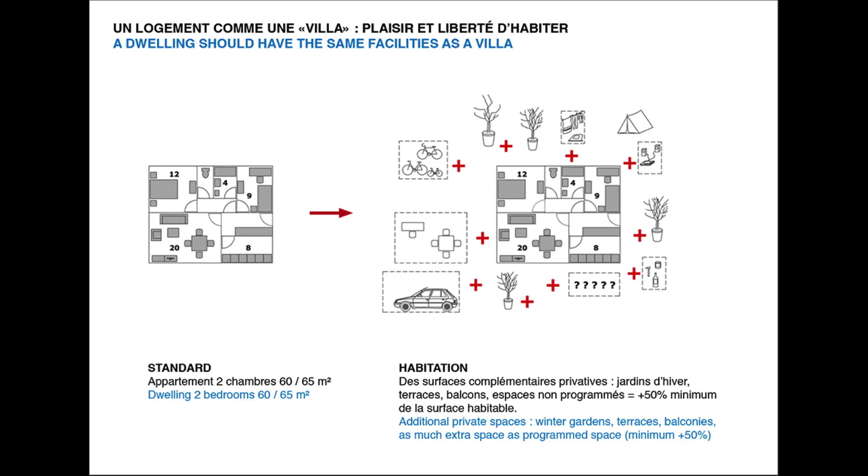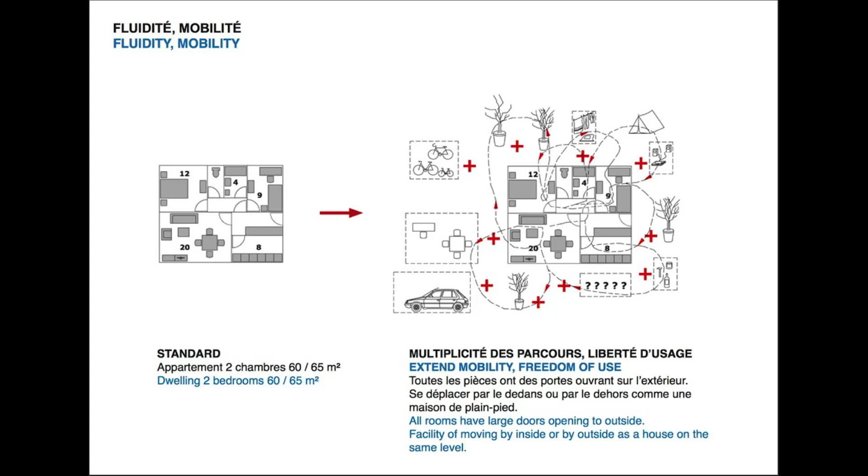Dwelling as a villa is also about fluidity and mobility. In a standard house, there is always one way to go from one room to another. The extra space allows to extend mobility and freedom of use. All the rooms should have large doors opening to the outside to give the facility to move not only from the interior but also from the exterior space, from one room to another.

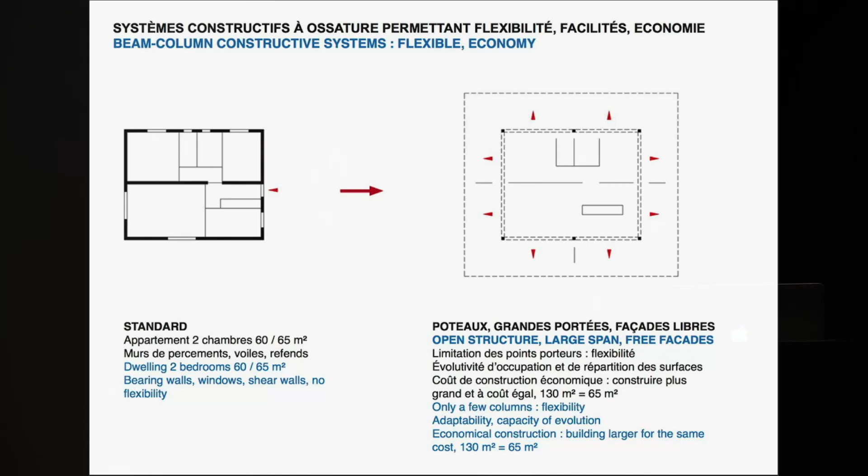It's what makes for us the quality of living in a villa. Then the use of open structure instead of building with very rigid bearing walls. We like to use the principle of open structure built with floors, large span, that allow us to free the facades, with only a few columns which allow the flexibility and the adaptability. It's also a very economical construction because we can use standard prefabricated structure. This allows most of the time to build housing at the same cost, but twice as large, with such structures.

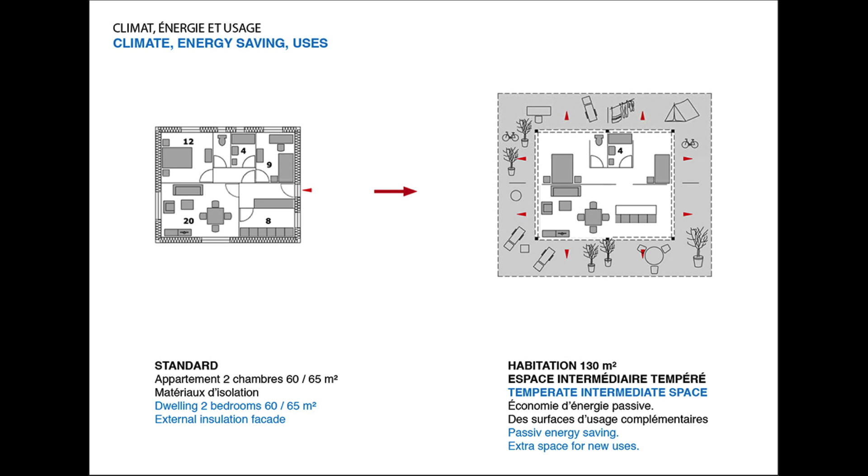Then the climate and energy saving. Instead of using the principle of insulation, we prefer to create this insulation through an intermediate space, a temperate intermediate space that is created by the principle of winter gardens. That summarizes all this idea of fluidity, mobility, openness, facility of movement, which for us characterizes a villa. There's also interesting efficiency in terms of passive energy systems, and at the same time it creates this extra space for use.

So building like a villa, dwelling like a villa, was our intention when we designed, a long time ago, our first house. We built it around 1992. Our aim for this family was to break the standard and to provide them with a generous and pleasant space to live in, despite the small budget. For the same budget, they could expect a small house of 60 to 70 square meters. Our goal was to double this surface for living compared to the standard, and to create an extra space as big as a traditional space.

So we were also involved in designing a bioclimatic house, which would take maximum benefit of the natural elements, especially the sun and natural ventilation. We used a very simple system of construction, and we were inspired by the technology of agricultural greenhouses to create such a space, oriented on the east, that is very efficient to create a good climate compared to the outside, but also a very interesting volume connected to the house to extend the living room.

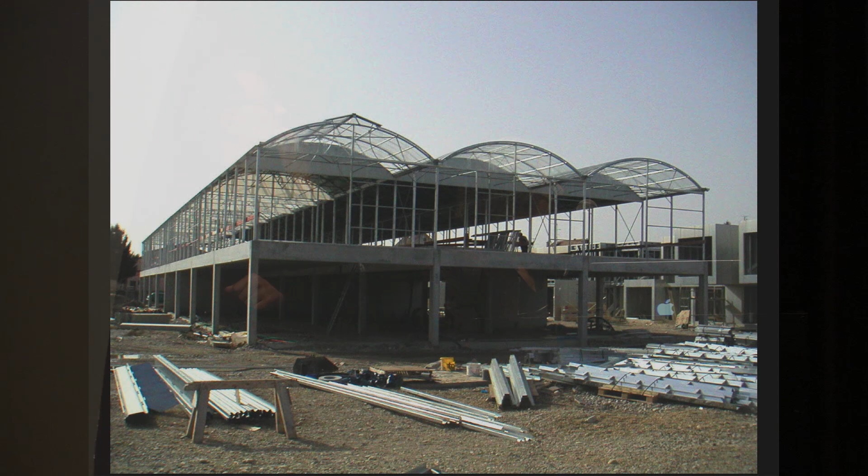So here again, we tried to see how it was possible to build larger without expanding the budget. We used especially the technology of greenhouses, a space we had studied carefully, and we observed that it was not only a very nice space but very clever and intelligent in the way it manages the natural climate with great precision, because growing flowers or vegetables for the market has high importance and high value for farmers, so they must be able to control the climate inside with great exactitude.

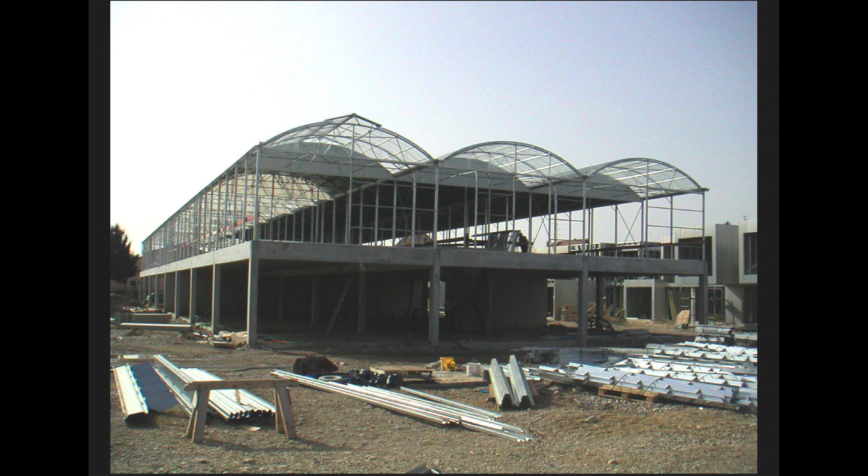So we proposed to use this technology in addition to a concrete open structure, and to build two levels: the ground floor, covered by a big concrete platform with only a few columns to support it, a prefabricated structure, and on top, 3 rows of greenhouses, exactly like we can find in the countryside. That construction system provided the biggest volume we could achieve on the site, at the maximum limit of construction and allowed height.

And then inside, we built with this structure like a very big loft. Afterward, the work was to divide it into 14 houses. And this is the final result, with these two different levels, the ground floor and the first floor.

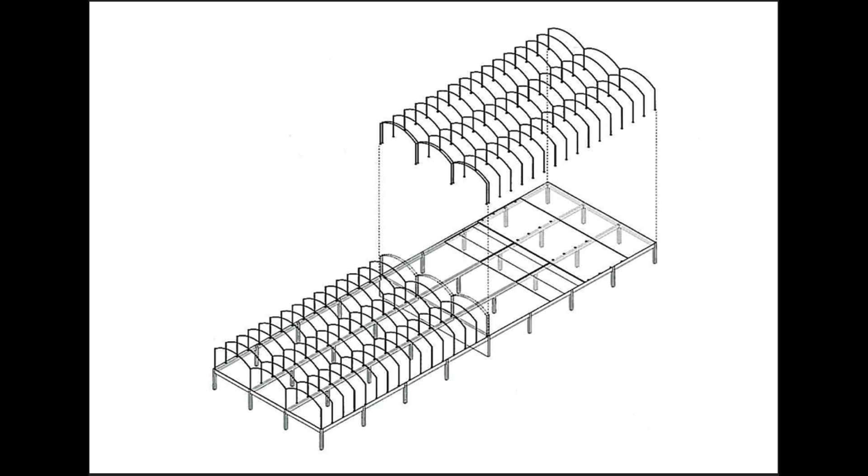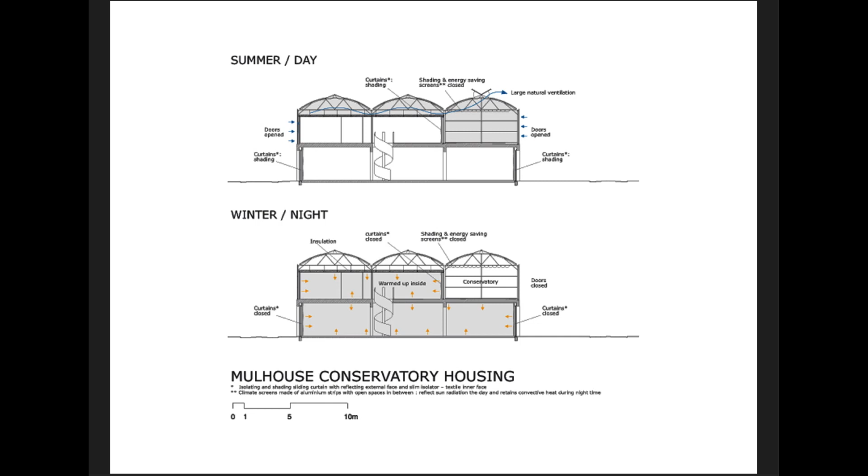So the constructing system, which is simple, efficient, and very economical, but also provides interesting space, because the efficiency must be given to the service of a nice living space. That allowed us to create two different atmospheres and conditions of space, the ground floor and the first floor under the greenhouses.

That was occupied by some wooden insulated boxes to extend the living space. We decided that every dwelling should have both conditions of space, ground floor and first floor, which gave this division of the plan, of the big volume we created, with every dwelling having 2 levels. Sometimes it's big on the ground floor and small on the first floor, and the neighbor is the opposite.

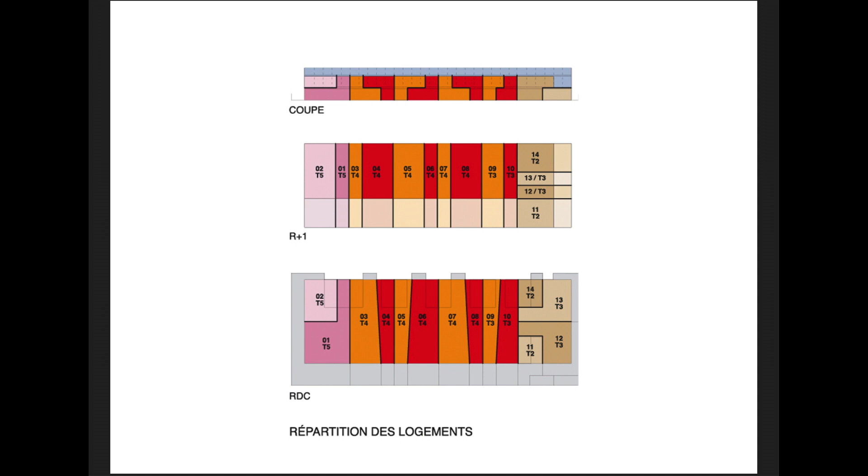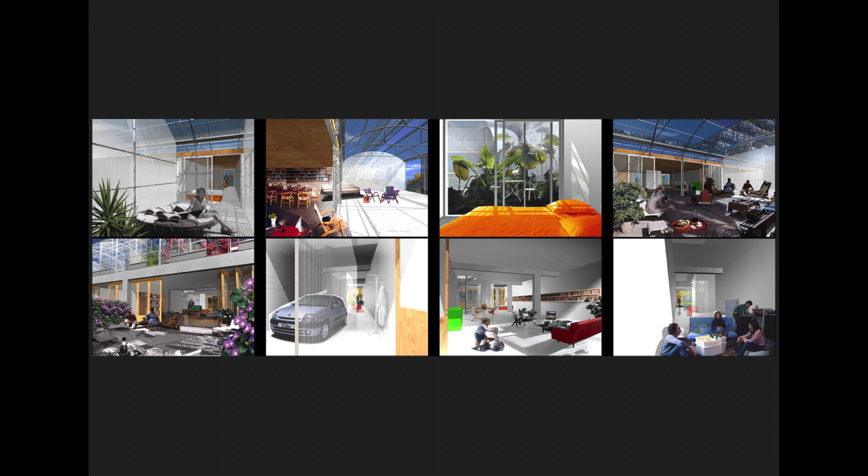We determined a dimension for the facade of the living room, which should be around 6 meters wide and 3 meters for the bedrooms. So in terms of representation, that was the representation of what could be one dwelling with a ground floor area and the first floor space under the greenhouses.

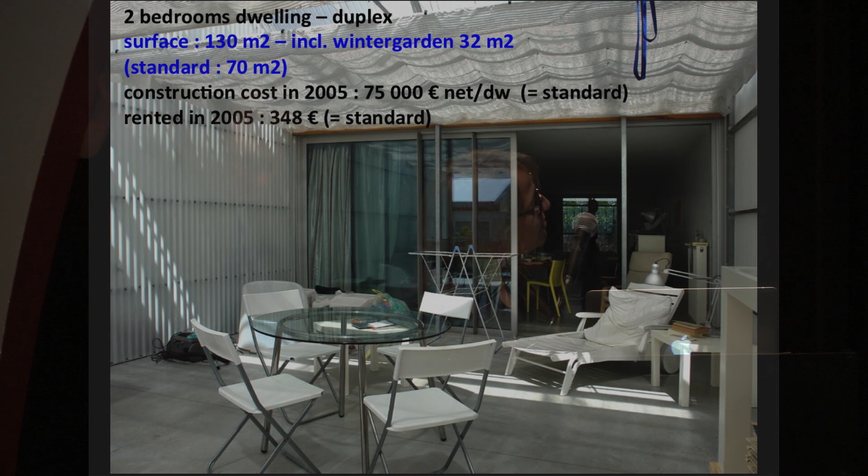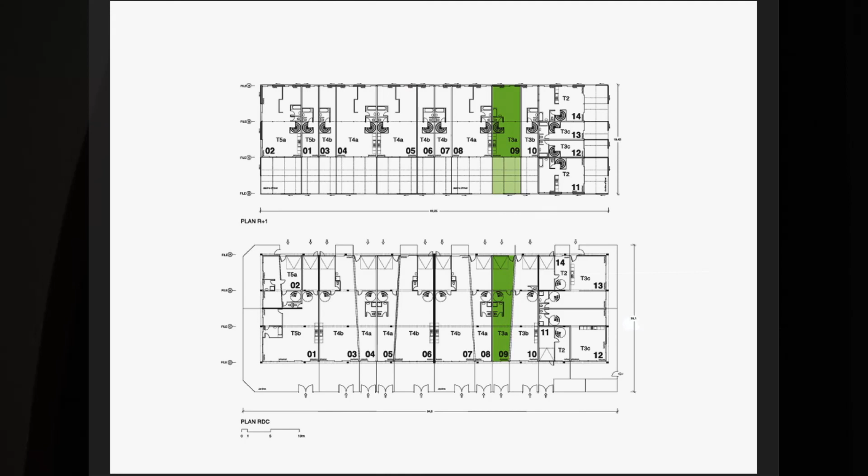Then we discussed with the owner. It was a very important discussion about the relationship between the rent and the surface of the dwelling, because normally the rent is determined in function of the surface. At the moment, we were providing in the same budget twice more square meters. It was important that the rent should not be increased twice as much, because otherwise it could not be social housing anymore. That was an interesting discussion, but the owner agreed very fast that if we built the project for the same cost, he would not change the rent, and he would rent the 130 square meters at the same cost, the same rent, as the 70 square meters.

So that's one of the dwellings, with the garage, which is also like a room that could be transformed very fast. And the first floor, which is a large living room connected with no partitions, the partitions have been made by the inhabitants themselves, and this large winter garden, which is connected to the living room.

And the dwelling, also a 4 bedroom dwelling, with 187 square meters instead of 100 square meters of the standard, and again the same cost of construction and the same rent. So this is this dwelling: the ground floor with 2 bedrooms, and the first floor with a large living room of 60 square meters, which has an extra space of another 60 square meters with this winter garden.

So just a few pictures for that. The owner was very happy with the result, as well as the inhabitants. Then we did a second project with the same owner, which is a public social housing company, but in this case it was a more dense condition with 5 levels. It was interesting to see how we could develop this idea of extending the space, making dwellings like a villa in a more dense situation.

So for that, the space has to be extended—not only the program, but also what can be considered around: space for invitation, collaboration, exhibitions, events, music, workshops, etc. So a platform of discussion.

We were thinking that in this old place where the harbor was, the first project could have been a sort of industrial building, something that could have been done perhaps 50 years before. So we tried to imagine this building could have been there before, and this is the idea to extend the space.

The budget for the School of Architecture for a program of 10,000 square meters was about 16 million euros. So the question for us was not only to make 10,000 square meters, but to provide 20,000 square meters for the school, and including the outside space, 30,000 square meters of floor to create this capacity as a platform. So the building is extremely efficient and economic in order to create this dimension within the same budget.

So for that, we created a sort of first building, an industrial building with three different levels: the first one 9 meters high from the ground floor, the second one 7 meters higher, and the third, which is also the roof, 7 meters higher again. Each of these floors has a capacity of 1 ton per square meter, much higher than normally demanded for the program.

And here it is the natural ground of the city, which is highly compacted in order to have a different nature than the artificial floors above.

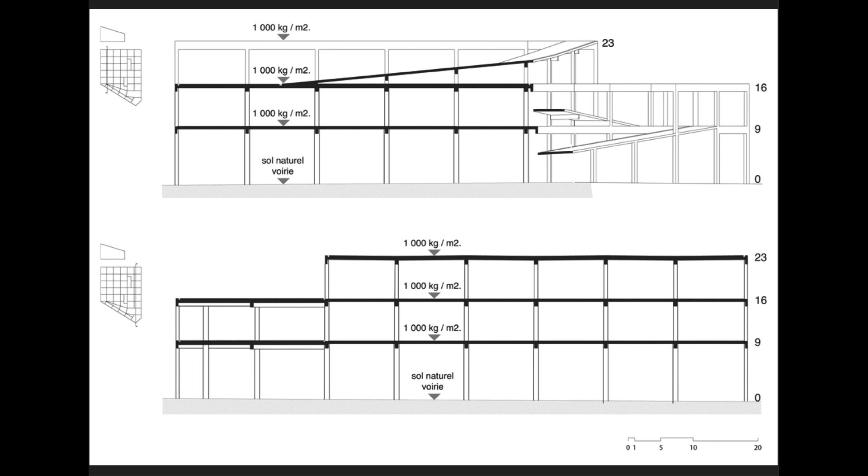A ramp, a sort of street, sometimes between 8 meters to 5 meters wide, gives the possibility for pedestrians, bikes, and also cars to go from the ground floor to the first level, to the second level, and then to the roof, considered as a sort of large agora.

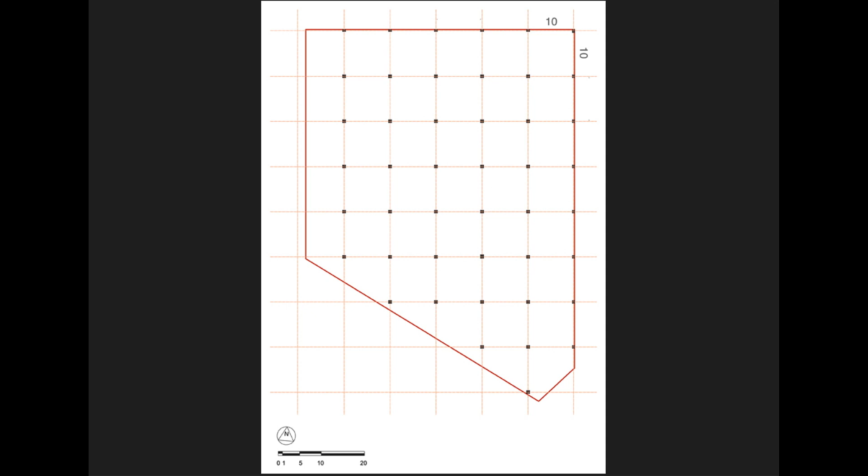So a very high, robust system with a grid of 10 meters by 10 meters, using only standardized component systems—columns, beams, and floors—with an extremely fast construction system, nearly 300 square meters a day, which makes this construction extremely efficient, extremely robust, but also very economic.

All the space of the parcel is taken—there are no places left. So we take the maximum dimension of the parcel and the maximum height permitted by the regulation, offering the maximum capacity.

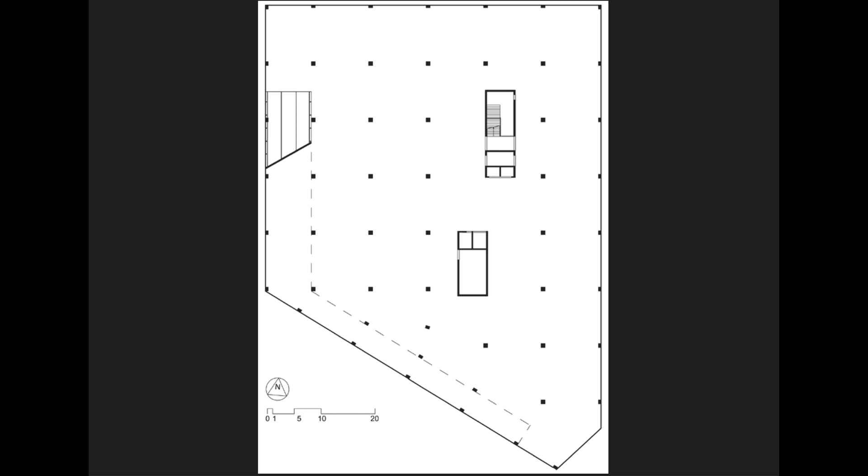So we see here the first level with the start of the ramp and the 2 cores for vertical distribution. This was the building offering capacity before the occupation by the School of Architecture.

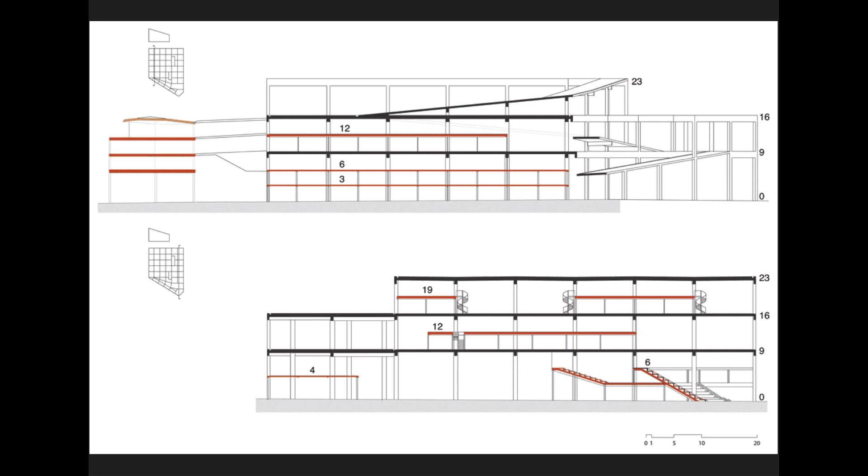Because the School of Architecture, coming inside this building, was able to establish new platforms, very light construction in steel and wood, that could take the capacity of the height and the resistance of each floor, creating a sort of mezzanine system to offer the possibility for the school's program and functions. And the auditorium is in this part here.

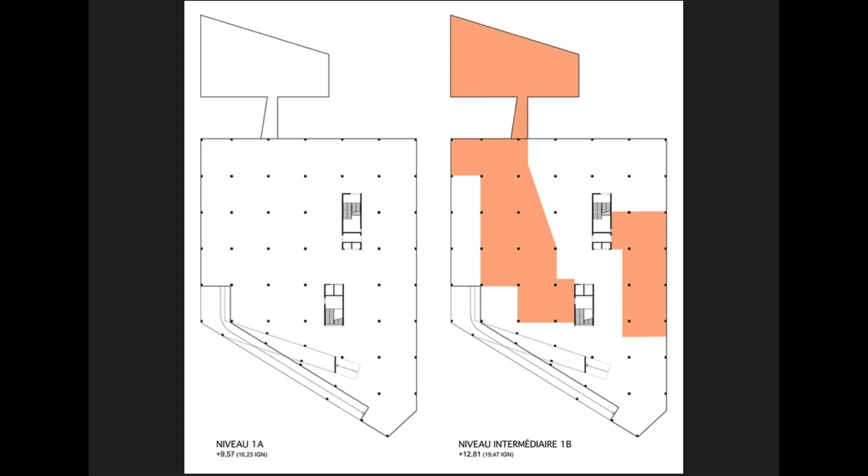These platforms take this dimension and occupation on each of the main levels. For example, here the level 1 is occupied by this mezzanine, 3 meters higher than this. Or the level 2, occupied by this mezzanine.

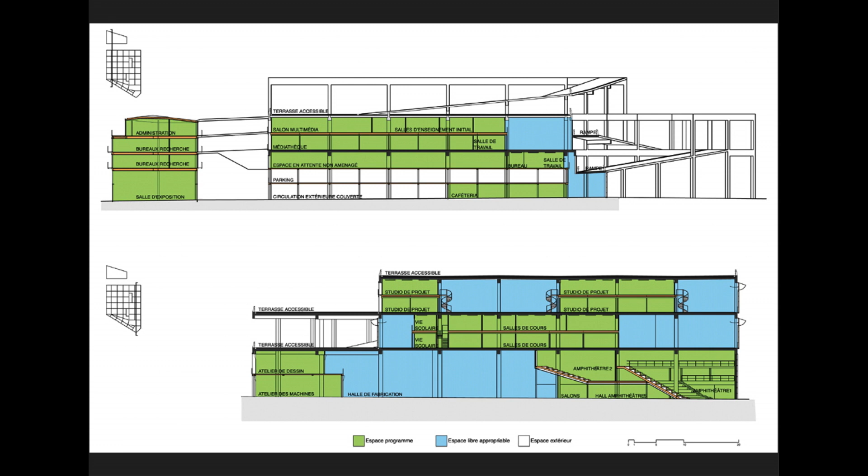By this definition of spaces, we create also inside the system 2 different climates. One, in green, is the standard climate, normally defined by the program—20 degrees in winter and a good temperature in summer. But also this one, the blue one, is a sort of intermediate climate, just slightly heated in order to never go under 10 degrees, but most of the time taking the radiation of the sun for a bioclimatic situation and solar energy.

And then the project was done with these elements and with this situation, also leading to this economy of project.

So every time it was possible to create relations with the city, to open the situation, we tried to make it. For example, here for the auditorium, there's a large door opening in order to create a relation between the audience, the stairs, and the outside, and the river, which is close to the school.

The space where we can build a lot of models is 1,000 square meters large and 10 meters high, which offers a lot of possibilities—possibilities of storage, to bring containers inside the school from the street.

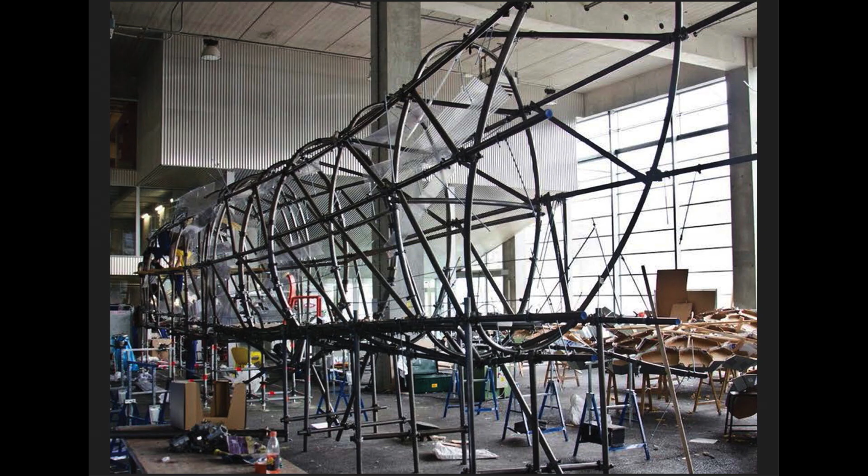You see here the existing ground of the city, which is very compacted, offering this connection with the street, and the possibility for students and professors to imagine different kinds of projects inside without any constraint, but also the possibility to create some concerts.

The auditorium with this possibility of opening the door to create situations between inside and outside, that is very much offered and used by scenography professors.

And this possibility for the students to use, to move, to have a lot of space, the relation with the outside and with the climate outside, or with the sun outside.

Possibilities to create a lot of projects linked with the classes - workshops, sports, places that you can use with tables and move to different places.

The transparency and the visions from one space to another, to the city - that is always important to link the different spaces together.

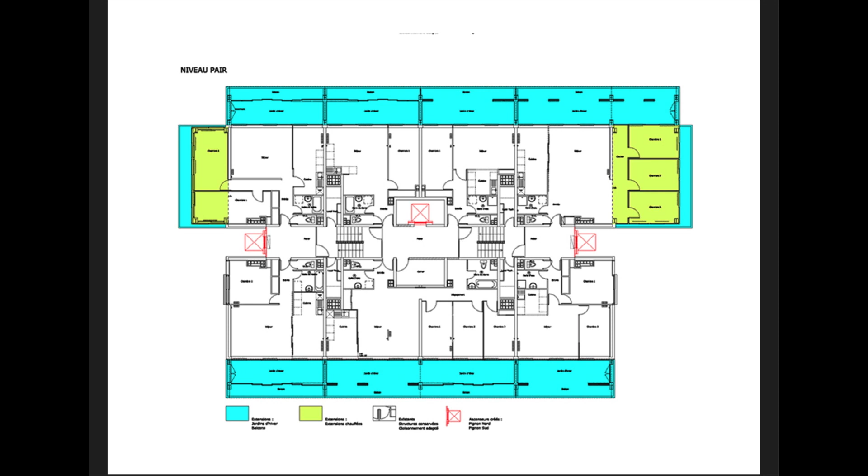Like for the Tour Bois-le-Prêtre in Paris, in the periphery of Paris, that was called Alcatraz, with 100 families, that project was to demolish it and to try to find a place for the inhabitants in plenty of other places in Paris. So inhabitants were totally against the solutions, so it was possible to try to apply our alternative. It is possible, instead of demolishing, to add, in some cases, some new bedrooms, some new winter gardens and balconies, a new kitchen or bedrooms, new elevators, repairing the bathrooms, repairing the electricity, and with the people inside to try to improve the situation.

So that makes that from this situation of extreme small dimension, we give more possibility, more freedom, more mobility, more possibility. And by the way, immediately it changed the image of the building from outside. So it means that working for each flat inside transforms the global image from outside.

So we see precisely that what was done during 50 years, perhaps 30 years later, was just to paint some figures on the facade, thinking that perhaps life would be better inside. But in fact, it's not possible to work on this kind of refurbishment. In fact, the richness is inside.

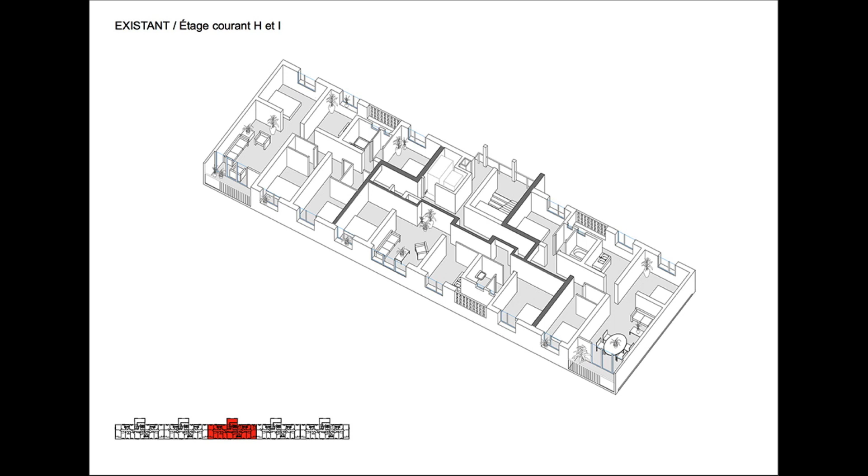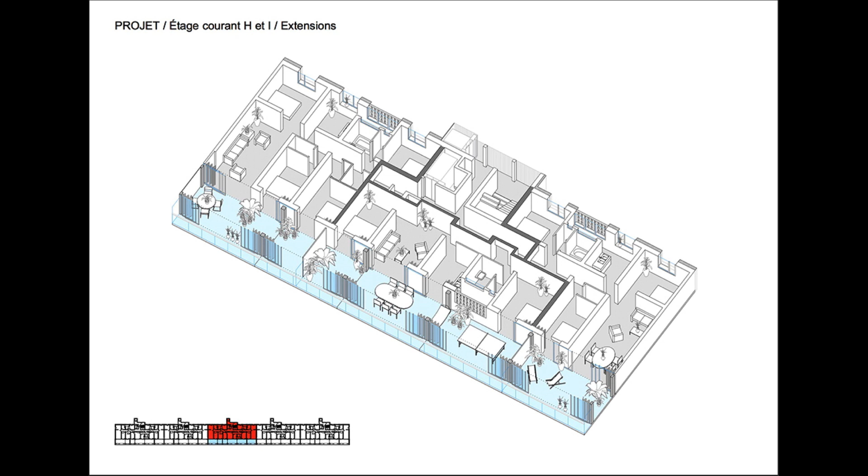So the question was to say, starting from one element, we have 5 like this in the big building, with 3 apartments with a core here, to say how we can extend by 4 meters deep, a new extension with a modular system of 6.4 all over the old facade, and create this extension.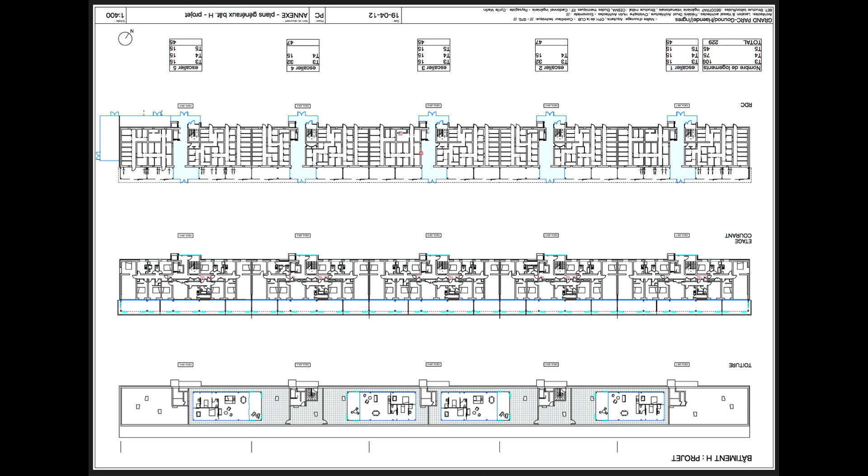So it means that for each apartment, we place this new element, sort of scaffolding that could be definitive and large enough, 4 meters. From this scaffolding, it is possible to open all the windows, to change all windows by new windows, create a winter garden and a balcony in order to change a flat into a villa and create this mobility that we were talking about before, for all the flats, for all the levels.

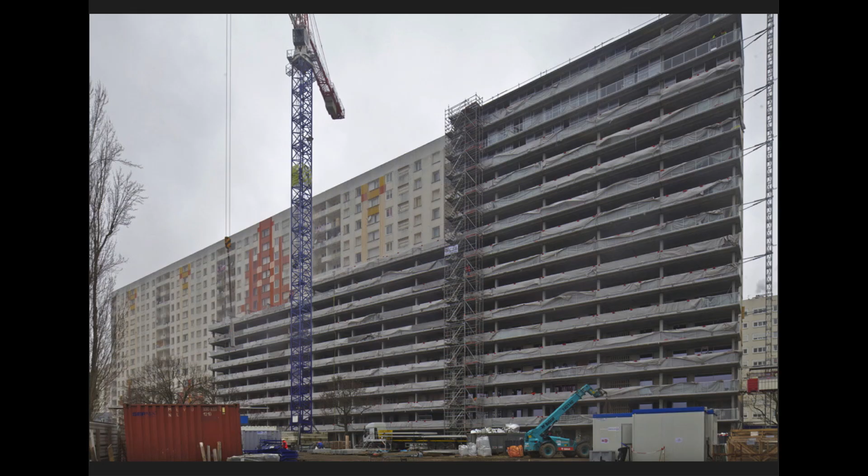So this was the situation, and step by step we change it with the population inside. Because the need of the population was to say, we want to sleep in our bedroom each night, we want to go and wash in our bathroom each night. So this question was to work on all these issues with the people inside, which was also very nice because immediately they were actors, nearly, of the transformation that was about their flat.

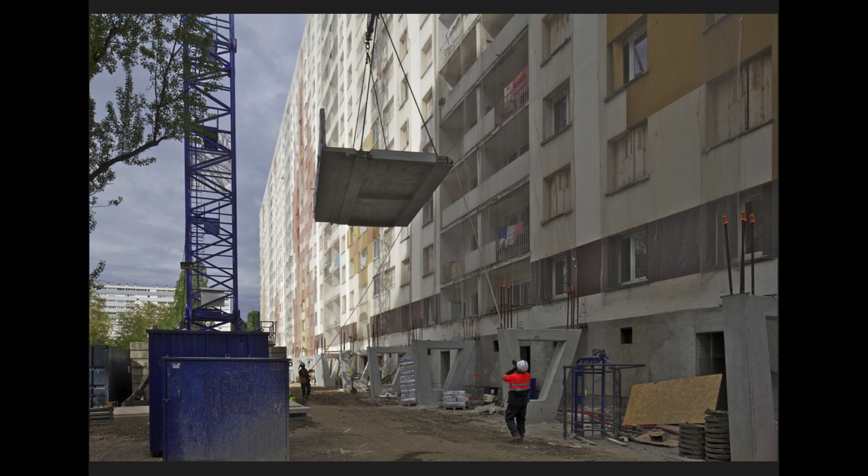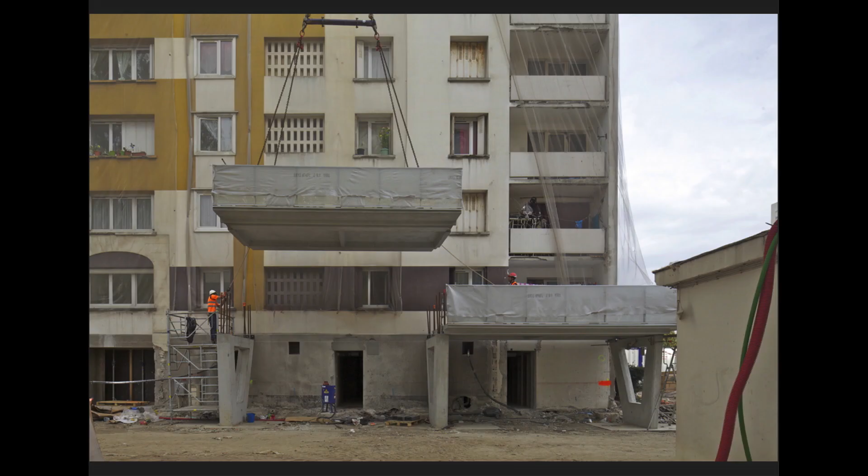So you see here the modular units taken, placed on these columns. They have their own stability, their own foundation. They do not report any load on the existing building, they are just stabilized with the facade of the existing building. So it's an element of 6.4 by 4 meters large, with already the balcony and the handrails that will be definitive, and that assure the protection of the workers in the first time.

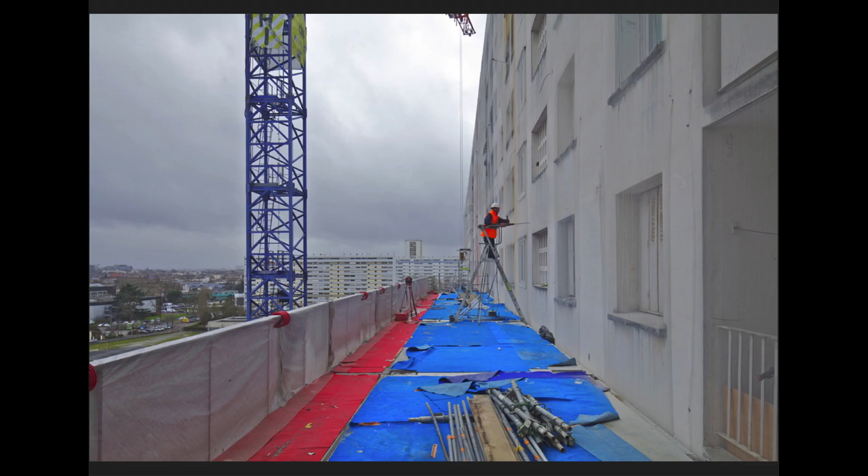So then we create these fixations on the old facade with the old windows. We place level on level. About 8 of these modular units was possible to place each day.

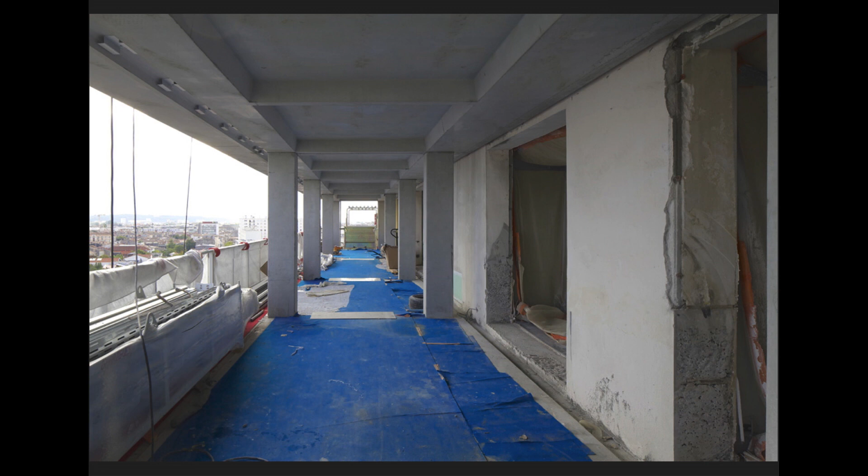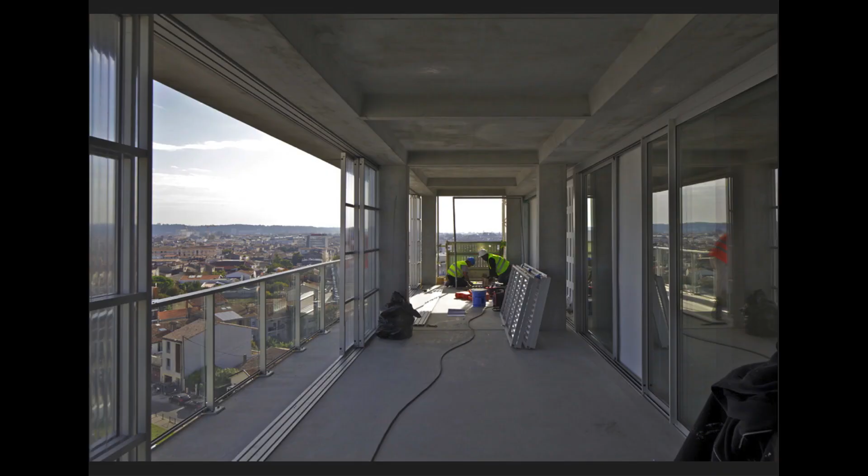And then we open the old windows to place new sliding windows, offering the passage from inside to outside, creating the second facade of the winter garden, and then the possibility to have this extra space, this garden, this freedom in addition to the existing.

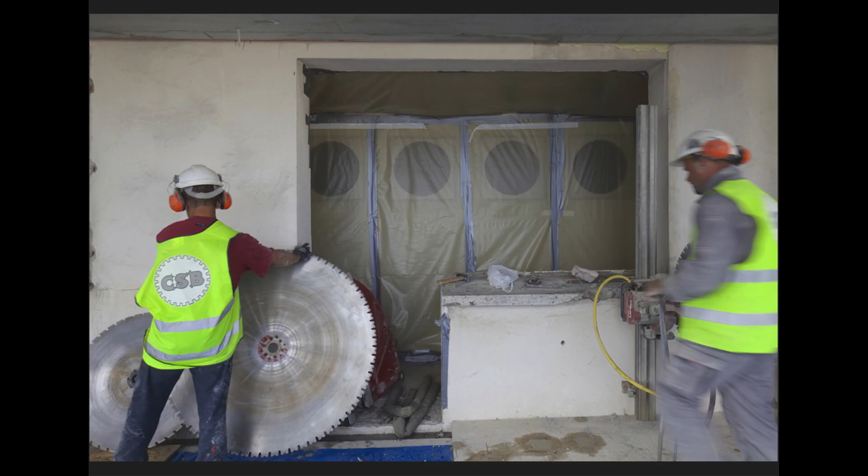So from another view, we see here the situation as it was before. Here, we cut the old window, and we take some protection about dust and also asbestos, which is partly around the windows, in order to protect the workers and the inhabitants inside. So for one morning, the inhabitant is a bit afraid

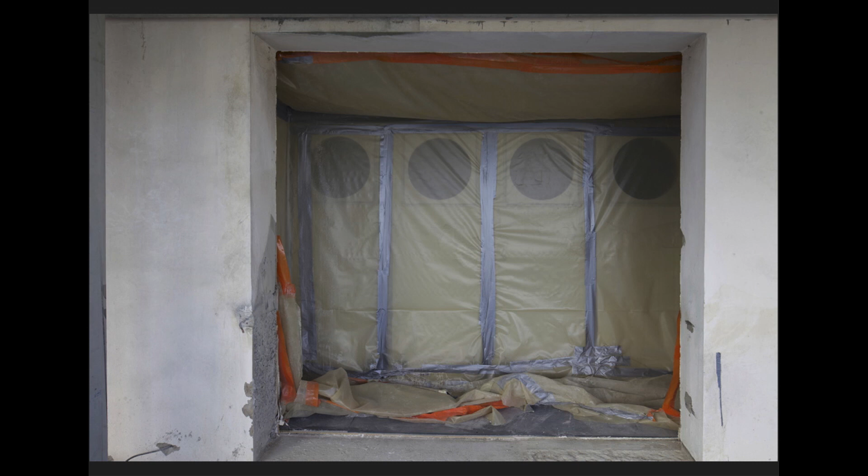And immediately, what was fantastic, it was to see the inhabitants participating nearly in the works and immediately using and placing new furniture, new functions on their winter garden.

And this relation with the climate that is totally different. Instead of these little windows, this possibility of filtering for intimacy or for climate, even if it is winter, if it is summer, if it is morning, if it is cloudy, if it is rainy, etc. All the time, this possibility for the inhabitants to control their relation with outside.

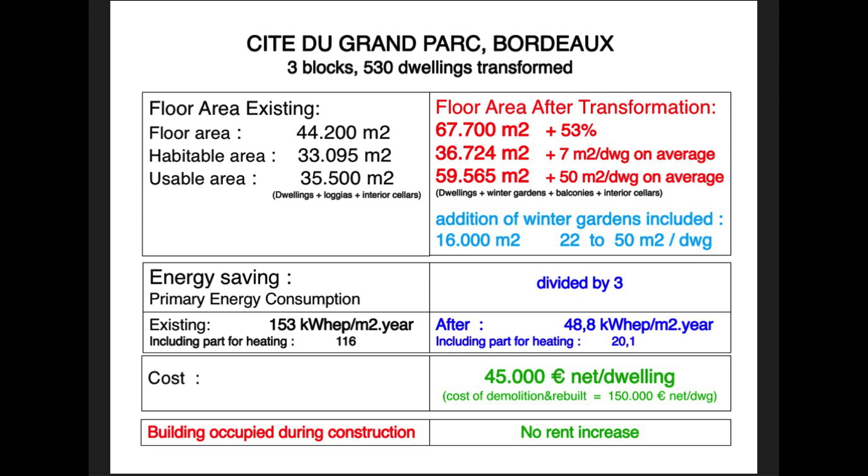and the cost is 45,000 euros net per dwelling, when if we consider the first idea, which was demolition of the existing and rebuilding the same number, it would have been 150,000 euros, so 3 times more, to do perhaps less surface than the existing. So here we can extend the surface, and at the same time be 3 times cheaper than demolition and rebuilding. And no rent increase.

By the way, in the arrangement, there was a small increase in the rent, but at the same time, the taxes and charges were smaller because of the energy savings and the new elevators. So in the end, what the inhabitant has to pay stays exactly the same as before. So it is something that is possible to do.

Very quickly, another situation in the west of France, in Saint-Nazaire, to see the possibility of densification. It is a typical area around the suburbs in France. This tower had 40 flats on 10 levels.

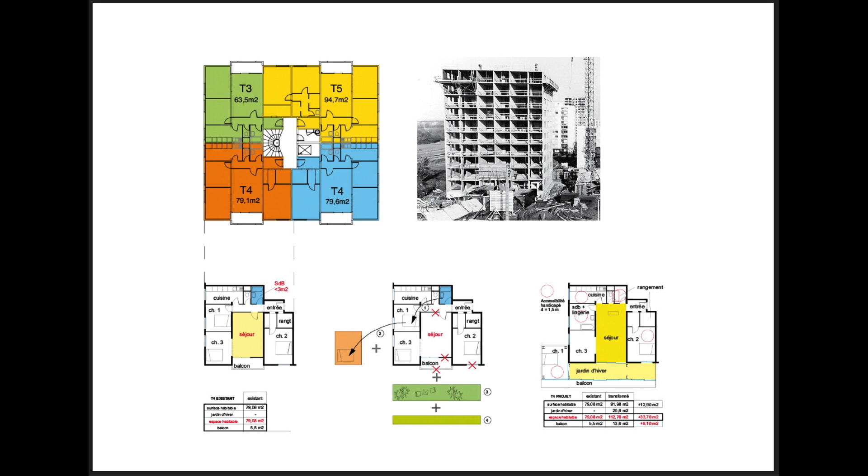And then we start from one situation of all these 4 flats by level with a very, very small bathroom here, that was a small living room, nearly no balcony, to see how it was possible for this small bathroom to take the place of the bedroom here, to have a big window here, then to find a new place for the bedroom here, new winter garden plus new balcony, in order to propose a new flat by extension of the existing. But at the same time, it was possible to densify the situation.

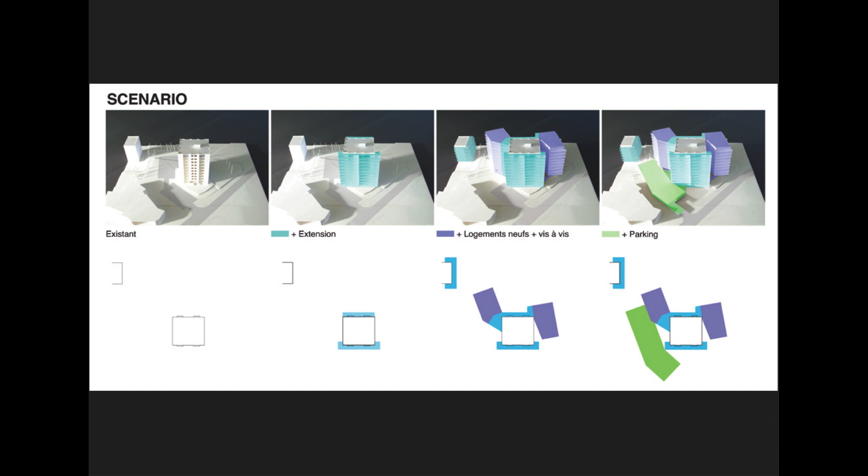So we create these new bedrooms and winter gardens all around the building. But here it was possible to add 2 new wings with 20 more flats here and 20 more flats there. So it means doubling the number of flats and increasing the dimension of all the flats. So without creating new roads, new streets, new electricity networks, etc., on a very small territory around the existing, this possibility to improve the quality of each apartment and at the same time create new apartments.

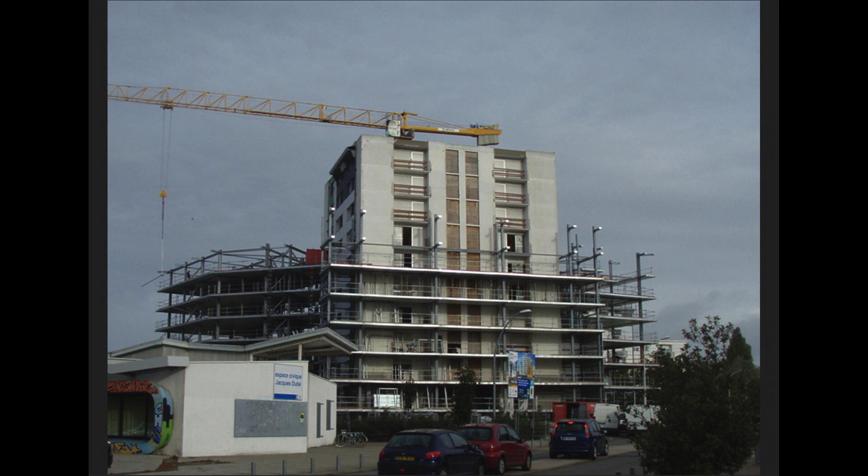So working really on densification that is able to transform a suburb into a part of the city. The old building and the extension propose a new situation.

So we think that it's also a question of urban planning, also a question of situation. I think what is interesting is to consider very precisely some situations, to listen, to observe extremely delicately the number of trees, the number of flats, what are the problems, what is the richness, what is interesting, what is missing. Is there something needed? If there is something needed, perhaps what can we do, what can we add? Or it is possible perhaps to add 5%, 10%, or 20% of new apartments that will create a new value for the situation. So the city is plenty of these situations everywhere - it's just needed to see them very precisely.

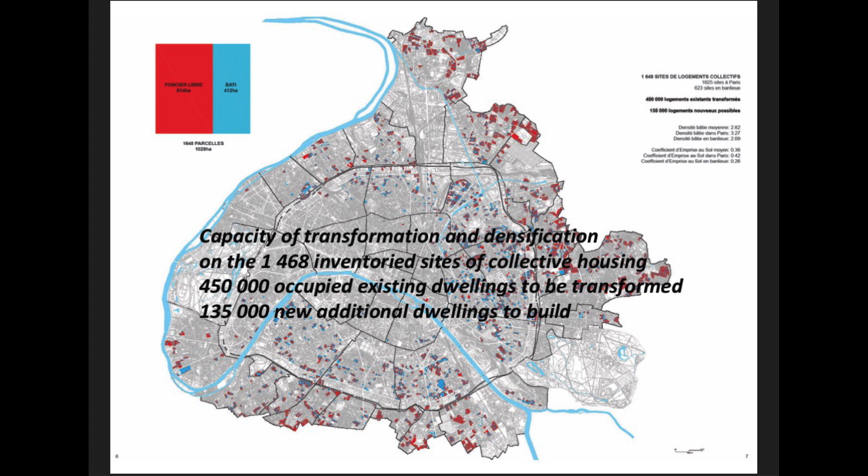In Paris, we made the work on 1,500 sites of collective housing that create the possibility of a little improvement, of change - a capacity of transformation and densification of these 1,500 inventoried sites. It is a possibility for 450,000 occupied existing dwellings to be transformed, and at the same time approximately 135,000 new additional dwellings to build. So a new value, a sustainable transformation, and an incredible capacity of densification if we look very precisely at the city and at the situations.

It means on each situation, to do or not to do.

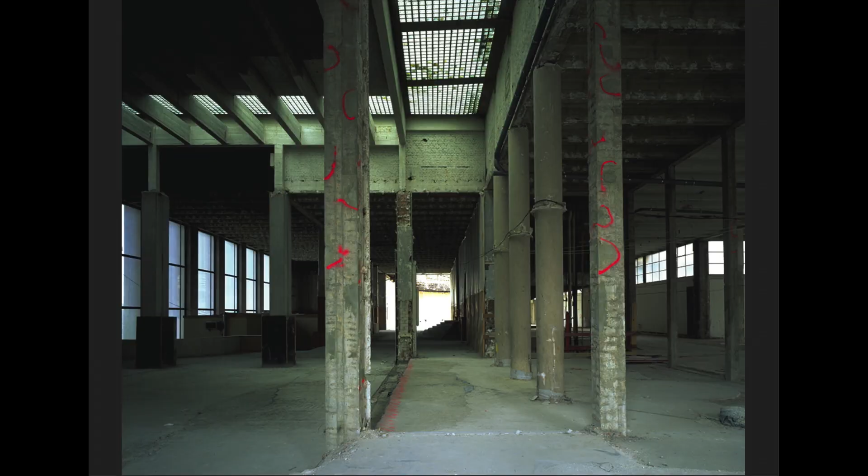An architect won the competition, and they started construction for 1 year. So that was the building when it was built in '37 - quite strong and impressive from the outside. After this 1 year of renovation conducted by this firm of architects, the government decided to stop the project. It stopped immediately, and the building was left in a situation nearly like a ruin inside, with all partitions demolished, all the networks, all elevators, half of the staircase torn down, no more electricity - just a strange situation of an abandoned building. It stayed like that for 2 or 3 years with a lot of damage happening in the building because of the rain coming inside, big holes, and so on.

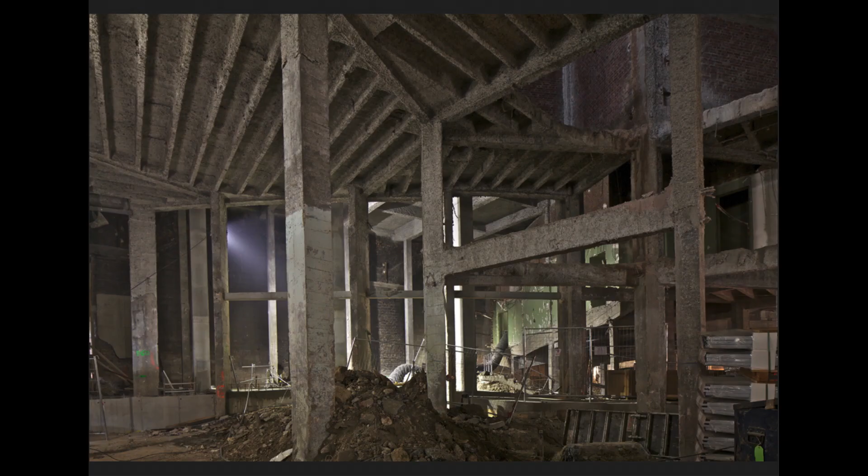And in 1999, the government decided to put inside a very small project called an installation - a temporary project for a contemporary art center, supposed to stay something like 5 years, dedicated to young contemporary artists. With a very small budget of 3 million to make this installation, while the building is something like 26,000 square meters in the state that you can see. So that was a great challenge, and we applied to the competition.

The competition was very fast, and we just had to come back with ideas and a method for working on this building. We came back with just a text and a list of works, because we were totally impressed and fascinated by the architecture, by the fact that this building had been made for a museum, very well done, with a lot of natural light to exhibit artworks. Given the situation, we didn't find it necessary to change the architecture or add any new architecture, just to make the minimum works so that this building could open again for exhibition and open again to the public. We made a list of very pragmatic works, starting from the most important, knowing that maybe there wouldn't be enough money for finishes, but that was enough.

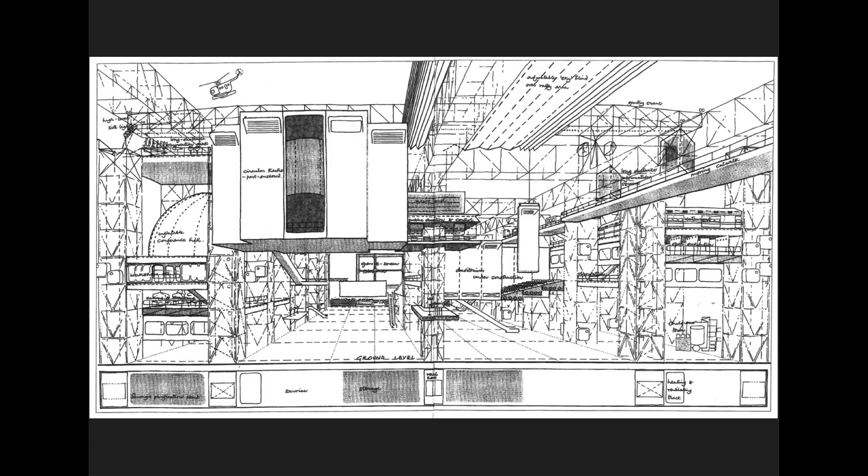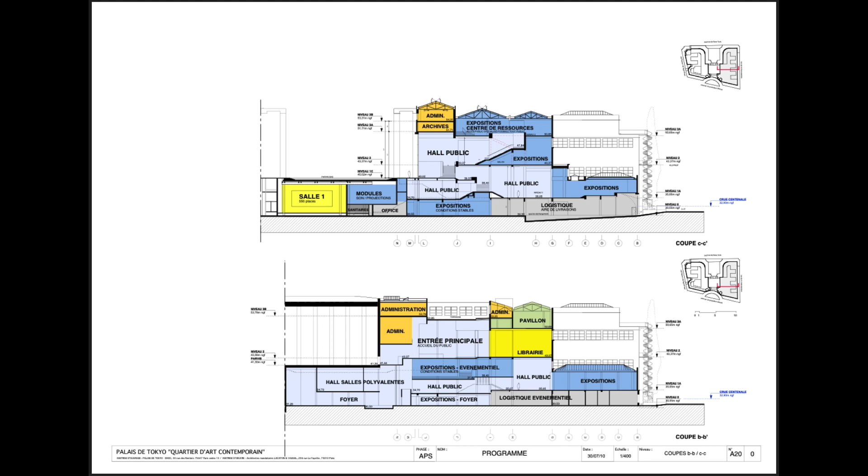We did that in two phases, one in 2000 and the second in 2012. Our inspiration for this project was the Fun Palace by Cedric Price, which for us is a very interesting project because it talks about the freedom of use of people in a building. That means instead of creating constraint, the building offers great flexibility and facility for users to be not only visitors but also actors of the building. So we proposed this for the huge building. In the first phase we did only one level, but it was very successful, and the government decided to make a second phase and extend the temporary installation for a while longer.

We proposed to use all the levels for public use, from the lower levels connected with the lower street, up to the last level, totally under a transparent roof. All the areas, except a very small area for logistic access and small storage, were open to the public, dedicated to exhibition or public events, as you can see in those sections. So our goal, with a small budget—the first phase was 3 million, the second was 12 million—which is very small for such a big building.

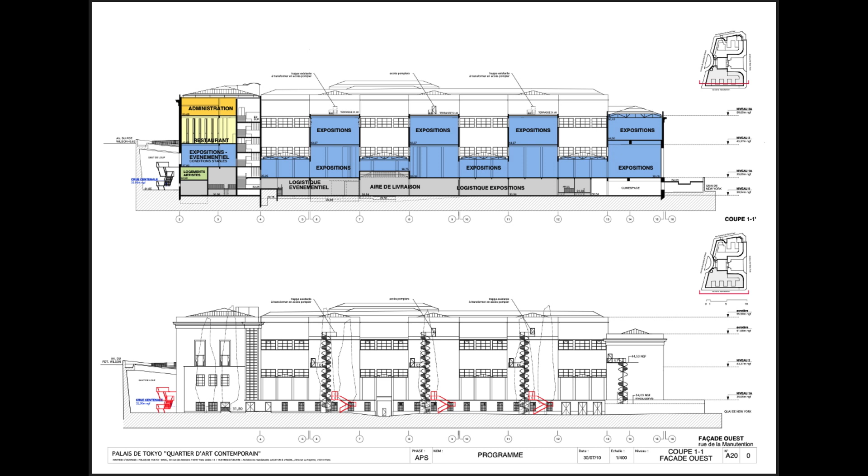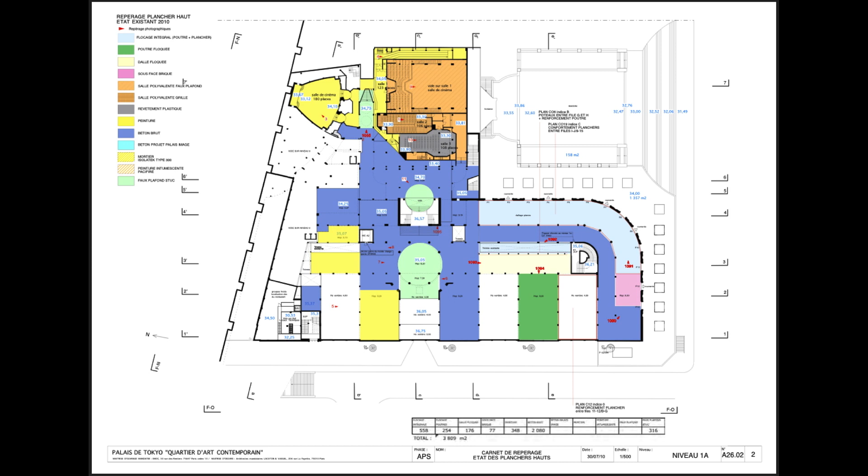For doing that, it was very important to have a very strict and exact knowledge of the building in order to avoid general works, and instead adapt the works to the right place for every part of the building. So this is, for example, an inventory and report of all the floors, their capacity and quality. Some of them were very weak, some much stronger, and that was very important to focus on the works needed in every place, again not making a general intervention.

We also did, in addition to the plans, a very detailed photography report, just to always keep in mind that we could work on a big number of small situations in order to reopen this building, rather than considering the building as a whole and making a general intervention.

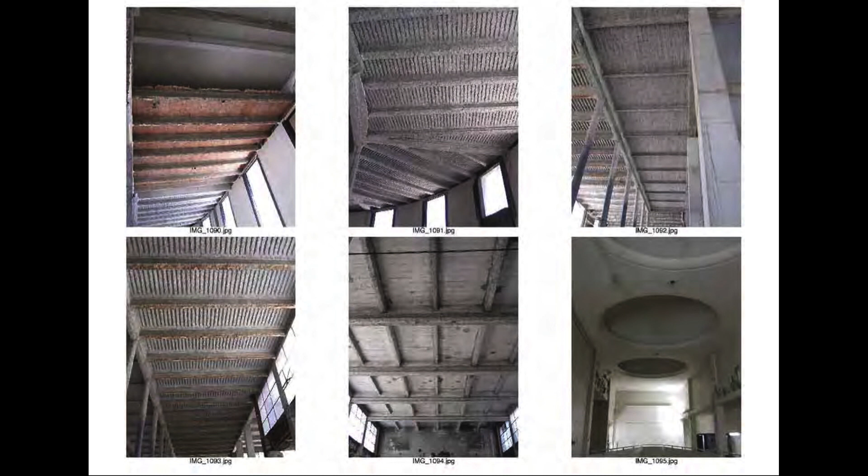This floor, for example, had been a temporary floor made to consolidate the building after they stopped the work, because there were big holes inside and the stability of the building was damaged. We tried to see how we could reuse these temporary floors with some reinforcement, making them final rather than demolishing everything inside again.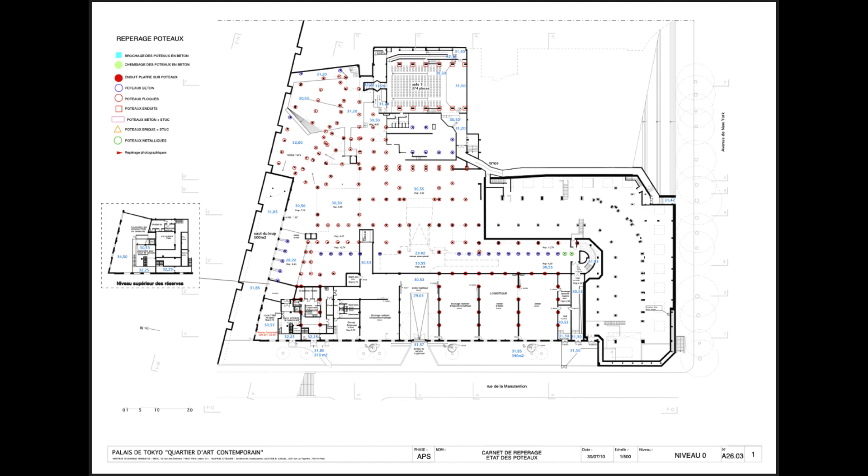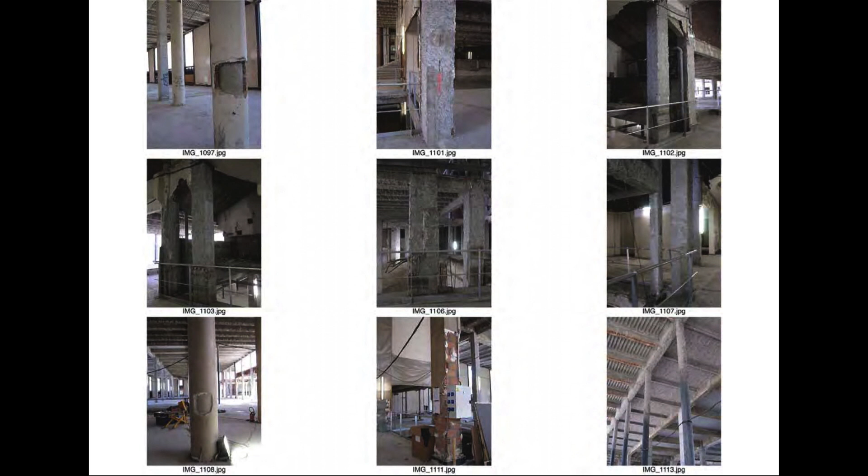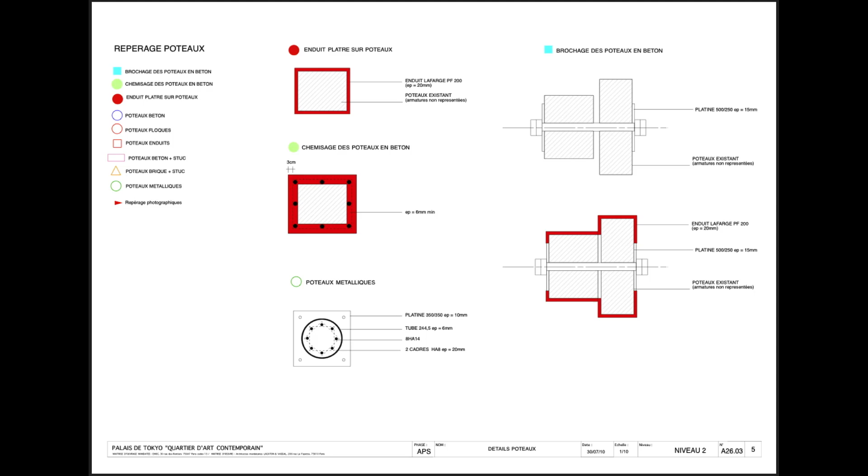We did the same with a very precise inventory and report on the quality of the columns, because we observed that the columns were very different. Some were weak, some were solid enough but not secure enough for fire, some just needed reinforcement, and some didn't need anything. It was very important to have this inventory to define, for every column, the right intervention, in order to be very precise and not do anything unnecessary in the building.

Finally, that gave us this map of intervention, which was not the usual plan that architects normally give in studies, but every red line represents a new intervention. It was the only way to explain to the workers and contractors what they had to do.

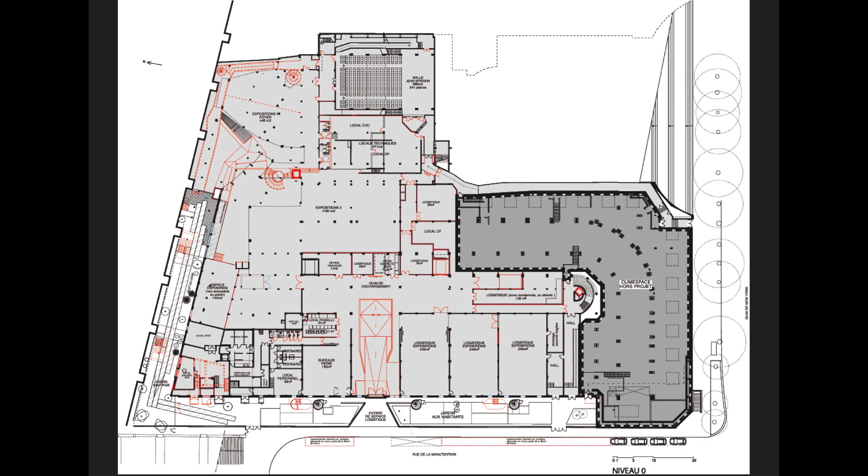So that was the intervention on the columns. With every color is a different kind of intervention. And doing that, we arrived in the budget which was given. We achieved our intentions, and we arrived to reopen the building to the exhibition and the artists. There were no finishes, but finally it wasn't really necessary because the space was interesting enough.

And also we provided a number of devices like mobile walls, curtains, and other devices that allow redefining the space at every exhibition according to the curator or the needs of the artist.

But all these spaces are widely open. This is not a place for art where only those who are really educated or informed can enter. People can become familiar with the artworks, because the place is very welcoming and very familiar for everyone, and it's possible to stay long and find the information. It's also a living place, not only a place for art.

So the lower levels have also been used as exhibition space, and they are very convenient for videos or interventions, like this old auditorium, which was never opened because there were no security exits. We just created new security routes, and it could be opened again. There's also the place which was normally dedicated for storage, but there is no storage because it's not really a museum.

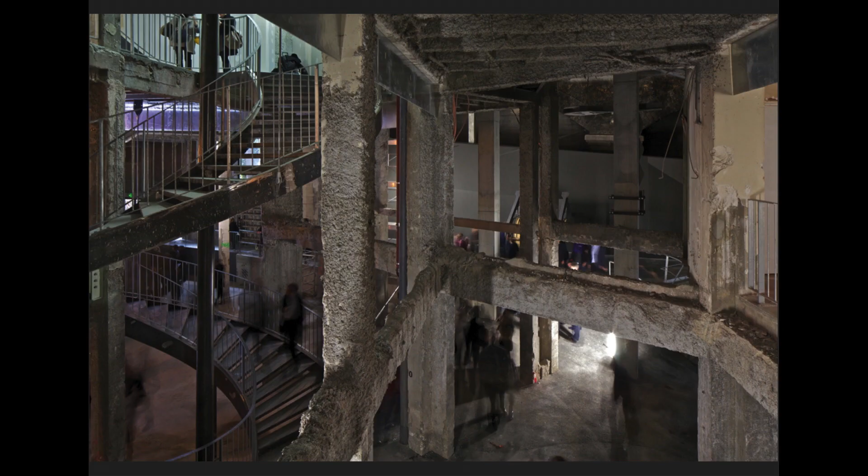And all the levels could be opened and are still open for visits and for exhibitions. We created this big stair to connect all the levels which were not connected, especially the lower level, which initially were the basements. And the last level, totally under the transparent roof, that we have refurbished, reusing there all the techniques of greenhouses to create a good climate.

This building has no air conditioning, so they have conditions with variations, but it's totally assumed by the team and the curators.

And the last project, which is also this question of reuse of space and what to do with the existing. The principle is first to look at places with a very positive eye and to see what we have in hand and what is offered by the place, instead of looking first at all the problems.

So this building was an old former place in the middle of a big shipyard, and that was the last space where the pieces of boats came to be assembled, and after that the boats moved to the sea. Now this building is alone in the middle of nowhere, because everything has been destroyed around. But this building was kept.

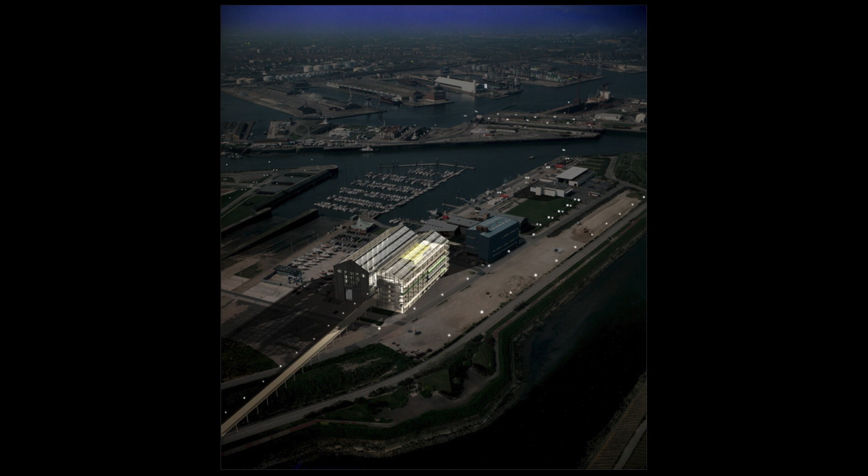But after and during the visit, we were really fascinated and touched by this space, and we very quickly had the intuition that it would be a mistake to fill this space with different floors at different levels. And finally, we decided that instead of filling the building, we would just create a double, a kind of mirror.

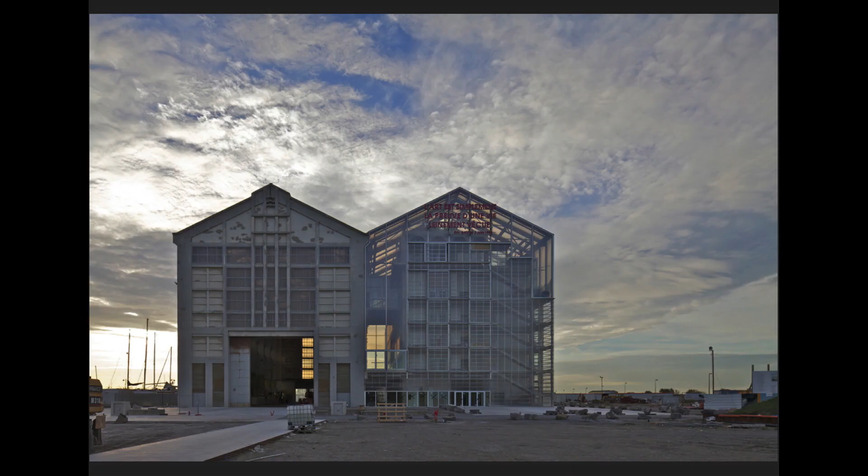Which was totally new, with contemporary construction, that would allow putting all the program inside this new building, in order to let the existing building remain totally empty and to give it the high capacity for great installations or even concerts or any big exhibition that could be possible there, while in the new program this volume was not possible.

So the new construction is made with exactly the same shape. Inside we have a concrete box, which contains all the storage and the exhibition rooms. That's a very good condition for the conservation of the artworks.

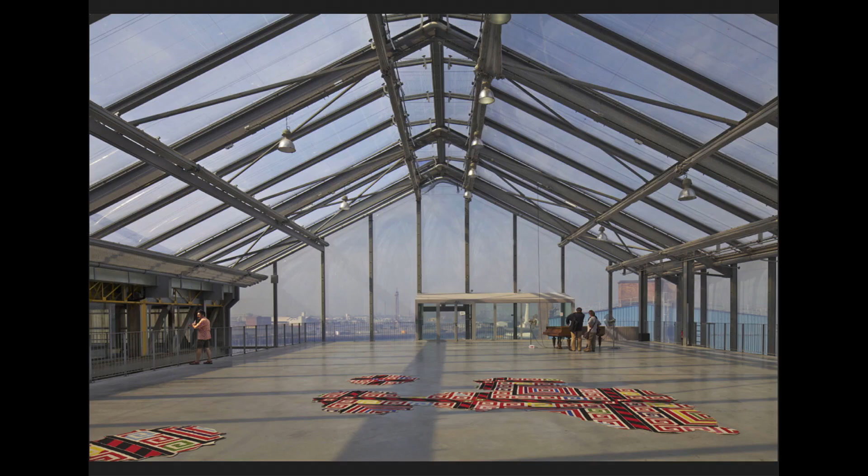And we have a second envelope, which creates an intermediate space, exactly the same as in the dwellings, that creates not only a climate but also an extra space for this contemporary art center. So this is the existing hall, one of the biggest new exhibition rooms, and the last level on top of the concrete box, which is an extra space under the transparent roof with very nice conditions of climate, but also with a nice view all around on the harbor as well as on the sea on the north. And some platforms which allow you to see what happened inside.

That's it. Thank you very much.

We don't have too much time. A bit long, sorry, we have been. No, it was a fantastic lecture. We don't have too much time for discussion because Anne and Jean-Philippe need to go to the airport tonight. But we have a little bit.

So I just want to start by saying how deeply I admire your work and the rigor and depth of your thinking and the political integrity and the true originality of your thinking. So because you're such philosophical architects, I want to ask you about three big philosophical topics: space, time, and architecture.

Earlier, in a conversation earlier today, you talked about your understanding of the connection between space and freedom and space and democracy, and I wonder if you would talk a little bit more about that.